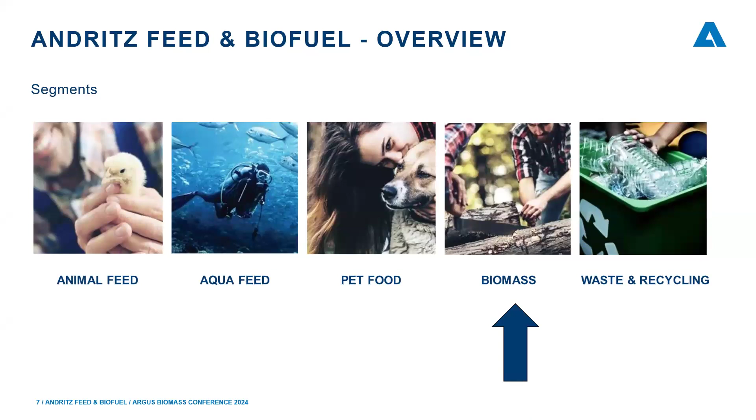Earlier, I was talking about Andritz as a whole. Under Andritz, as I said, we have different verticals. Now I'm talking about Andritz Feed and Biofuel. Under Andritz Feed and Biofuel, we have different segments: animal feed, aqua, pet food, biomass, and waste and recycling. Today, we will be talking about biomass. I will be focusing more on biomass.

Earlier I spoke about Andritz as a whole, then Andritz Feed and Biofuel as an entity, and now Andritz Feed and Biofuel in India. We have a presence in India with a head office in Chennai, located in southeast India. From India, we operate in India, Sri Lanka, and Nepal. We are around 84 employees.

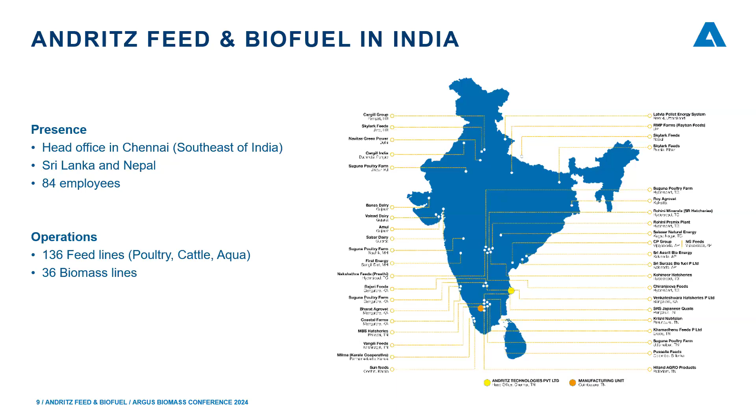On the right-hand side, this is the number of plants we have sold in India, spread all over India, Sri Lanka, and Nepal. At the moment, we have altogether 136 feed lines in poultry, cattle, and aqua, which we are not talking about today. We are talking only about biomass, where we have 36 biomass pelleting lines.

How did biomass start in India? Let me give a small background about stubble burning. What is stubble burning? It is actually a practice of intentional burning of straw post harvesting, widely spread after the harvesting of grain like rice and wheat.

This is a very common practice in India, contributing to greenhouse gases. But what is the reason people choose stubble burning? Because it is very cost effective and cheaper compared to alternative removal methods.

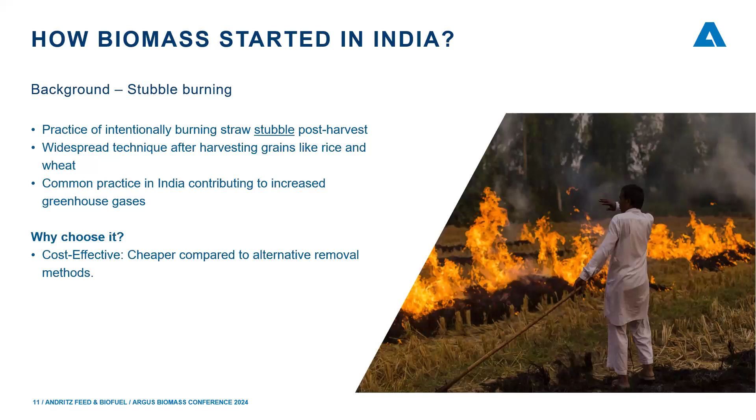If you see the stubble burning effects and solutions - what are the effects? Air pollution leading to poor air quality and health issues, risk of fire which can sometimes go out of control, and emission of greenhouse gases. The pictures on the right-hand side are taken from NASA satellite images, capturing where stubble burning happened in North India and how the smoke spread all over North India.

What is the alternate solution? The alternate solution to reduce pollution from stubble burning involves mitigating crop farming, adhering to diversification of agriculture, adopting paddy straw farming techniques, and making biomass pellets and briquettes.

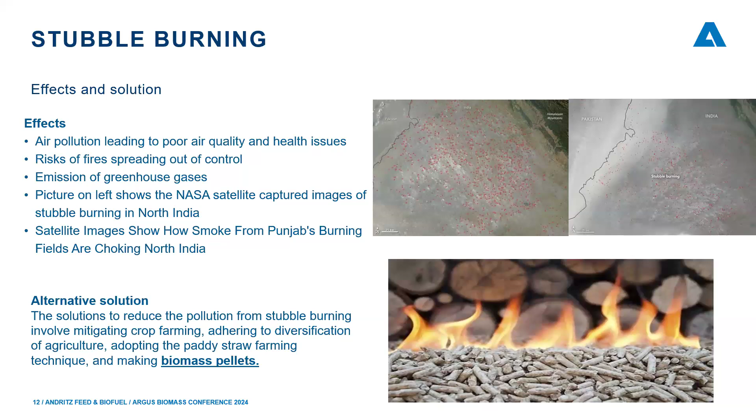This is biomass generation in India - a small insight into key biomass categories. India, being a diverse crop pattern yield, generates 730 million tons of biomass annually, out of which 500 million tons is utilized for mulching, power generation, cattle feed, and steam production. Apart from that, another 230 million tons is surplus biomass, which is just being burnt in fields.

The main biomass categories include bagasse, which is 90 million tons per year, mustard, cotton stalks, and last but not least, paddy, which is ample in India.

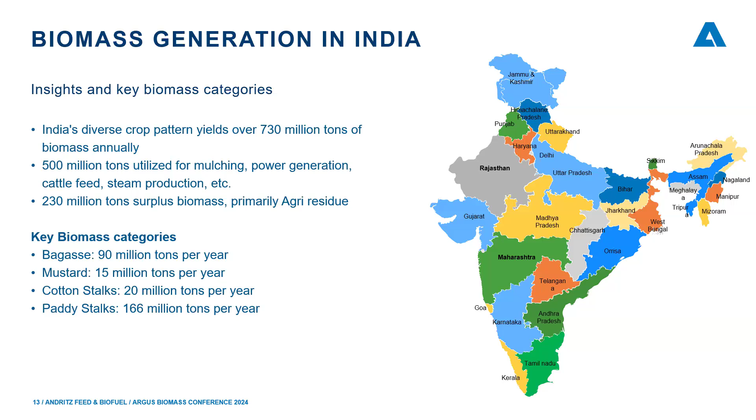Where can this biomass be utilized? This is an integration part in power generation. NTPC, popularly known as National Thermal Power Corporation of India, generates 25% of power in India. They have 27 power stations producing 52 gigawatts, and 9 associate stations contributing 7 gigawatts. If NTPC starts co-firing these biomass pellets, they would need at least 30,000 tons of pellets per day.

Beyond NTPC, India has a lot of thermal power plants, numbering 233 stations with an installed capacity of 330 gigawatts. If these thermal power plants start co-firing 5% agriculture biomass pellets, they would need around 160,000 tons of pellets per day. We also have 280 coal-based power plants producing a capacity of 400 gigawatts. If they go a minimum of 5% biomass pellets, they would need around 192,000 tons per day of pellets, which is quite huge.

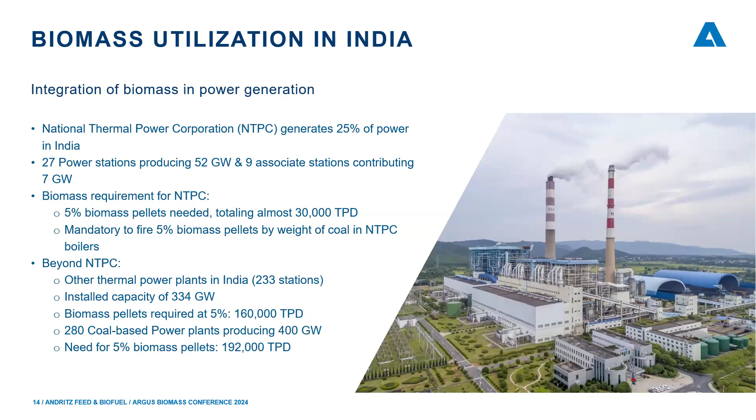Okay, what drives this? If somebody wants to put a plant, what exactly drives them? It is something called a biomass program. The Ministry of India has come up with a lot of schemes to support promotion of manufacturing of briquettes and pellets based on cogeneration in industry in India.

What is the objective of this? The objective of the biomass program is to support setting up of biomass briquettes and pellets manufacturing plants, and to support biomass which are non-bagasse based cogeneration projects in industries in India. This was initially from 2021 to 2026, but in my coming slides I'll be saying these are being revised for the next 25 years.

What are the salient features of this biomass program? The program offers Central Financial Assistance to support project developers and service charges for implementing and inspecting agencies. How is the funding being done?

Financial assistance available under this program is as follows: for briquetting and pelleting, anybody who wants to put up a plant gets a minimum of 10 lakhs per metric ton manufacturing capacity, and can go up to 50 lakhs per plant. Any plant which is non-bagasse based, the funding starts from 40 lakhs per megawatt and can avail up to 5 crores per project.

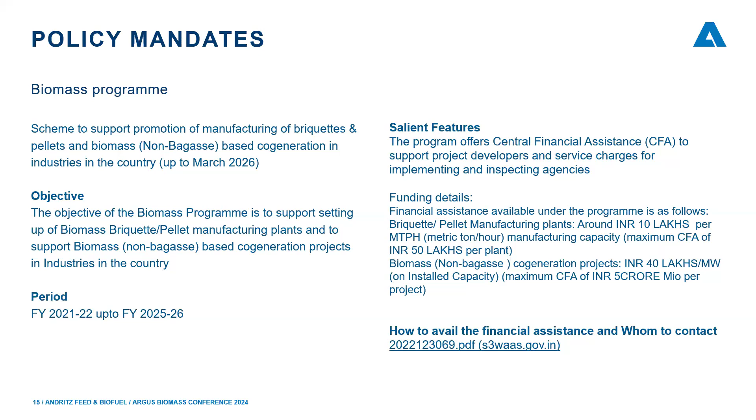The policy which was given earlier is being revised again. Earlier, it was not mandatory that you need to co-fire these biomass pellets with coal. Now the Indian Ministry, the Power Ministry, has come up with mandates that 5% co-firing should be done in thermal power plants from 2024 to 25.

This comes from the Union Ministry of Power and New and Renewable Energy. They revealed that 47 thermal power plants have already engaged in co-firing agro-residue based biomass pellets with coal.

The Ministry of Power made modifications, revising again on this date. As I said, the revised policy now states a minimum of 5% of biomass pellets has to co-fire with all thermal power plants. The obligation is set to increase to 7% from 5% starting financial year 25-26, according to the updated policies.

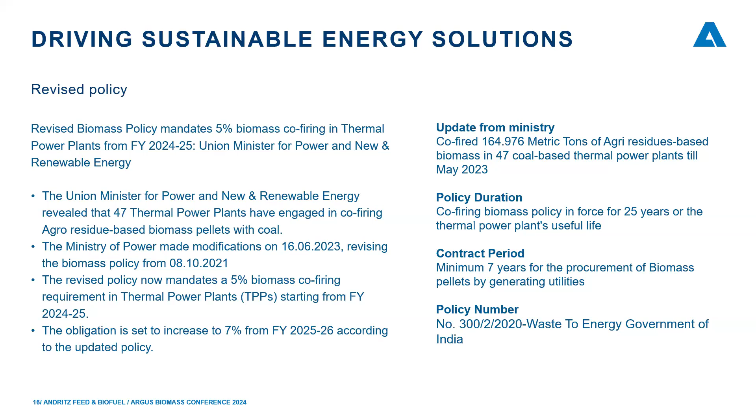The co-firing policy is in force for the next 25 years, or the usage life of the thermal power plant. Contract period: once a company gets into a contract with NTPC, this will go for a minimum of 7 years, during which he can supply the pellets. Again, I have put down the policy numbers.

Now, what is Andritz's contribution? What has Andritz done in biomass in India? Andritz has sold 12 biomass pelleting plants, altogether 36 pelleting lines, producing 550,000 metric tons of pellets per annum, and we have a 40% market share in India.

We have a lot of projects, and at the moment we have ongoing projects. We are building a biomass pelleting plant on bamboo, where the raw material is bamboo, giving a capacity of 325,000 metric tons per annum. This is one plant, and another is on mustard husk, which is 200 tons per day, giving 63,000 metric tons of pellets annually. This plant is coming in Haryana, very close to Delhi NCR.

We are also working with a company called Jindal Power, where we have bagged an order for a biomass pelleting plant on rice straw, with a capacity of 48,000 metric tons per annum. This is part of our global endeavors and collaboration on the world's largest plants. Apart from this, we are also working with a company in India that wants to build the world's largest biomass pelleting plant, of 1.2 million metric tons per annum. The beauty of all this is that we do all turnkey projects.

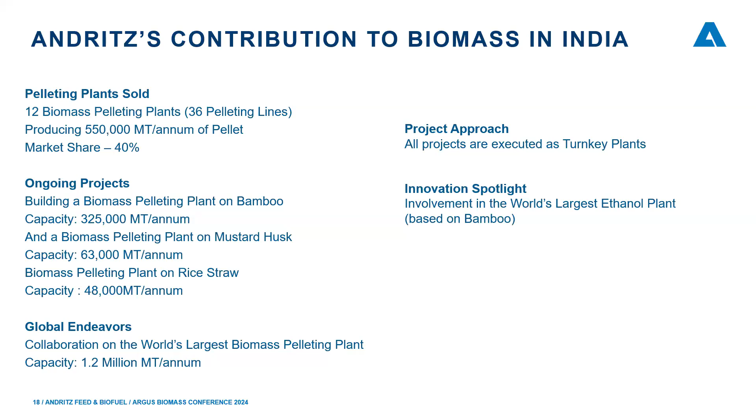The typical flow diagram of a biomass pelleting plant: we start from dumping of raw material, then grinding, drying, pelleting, cooling, sieving, and packing. The complete process is shown in one picture with all the machines shown on the bottom.

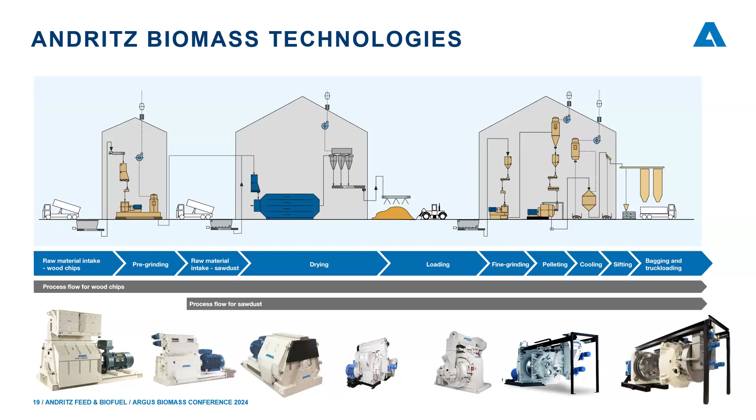The references - as you know, Reliance Industries is one of the largest companies in the world. They have two of the world's largest refineries, located in Jamnagar.

India will fully move from fossil fuel to renewable energy in the next few decades - these are the words from the chairman of Reliance, Mr. Mukesh Ambani. Reliance operates two giant refineries with a combined capacity of 1.4 million barrels per day in Western India, in Jamnagar, and aims to become net zero carbon by 2035.

To start with, they gave an order to Andritz, and this plant was installed in 2023 and has been running successfully for the past two years.

They have gone with a lot of raw materials. Reliance is the only company that gets ample raw material and different kinds of raw materials. Our plants are running on these various raw materials - we have Juliflora, cotton stalks, rice straw, wheat straw, rice husk, sugarcane trash, bagasse, and a little bit of sawdust. These pellets are being co-fired with their refineries.

As I said, they have got two of the world's largest refineries, and they co-fire with coal.

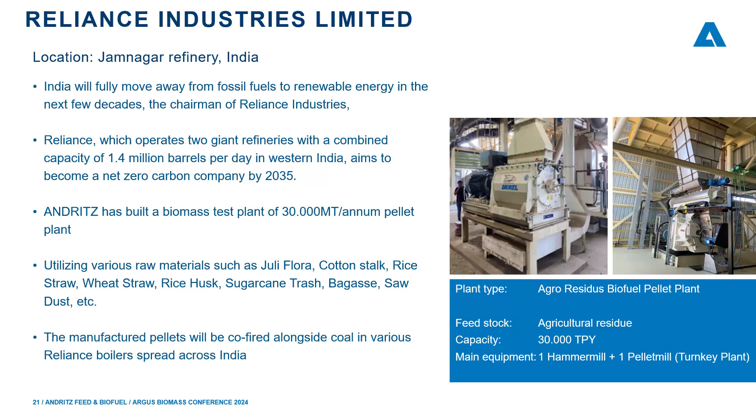Apart from Reliance, Andritz has got the largest plant in India. This plant is of 1,000 tons per day, and the raw material would be bamboo. The company name is Rashmi Metaliks, which is in West Bengal.

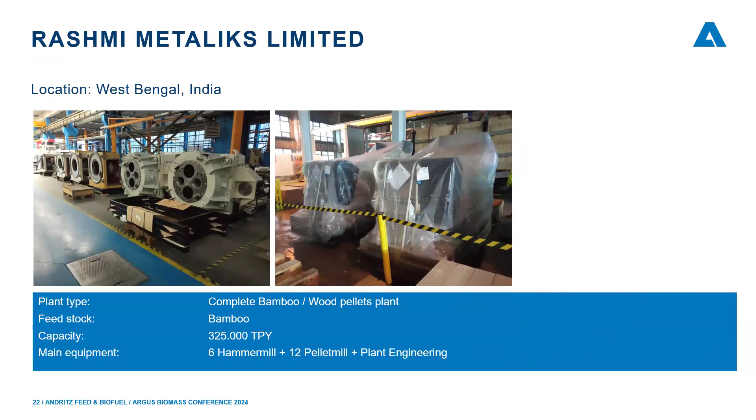We have recently commissioned this plant of 200 tons per day. This is a biomass pelleting plant where the raw material is cotton stalks and rice straw, running successfully. This is the only plant in India, I would proudly say, that is running properly on rice straw, supplied by Andritz. It's a complete turnkey project.

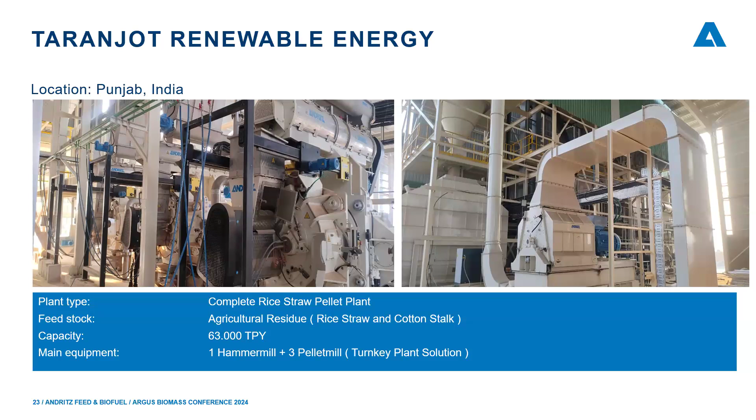This project, as I was talking about the ethanol plant - this is the world's largest ethanol plant where the raw material is bamboo, and a part of the complete plant is given by Andritz. We have given the intake section where the bamboo comes to the plant. We clean the bamboo, we chip it, we store it, we sieve it again, and then send it to the next process. So this complete plant is given by Andritz.

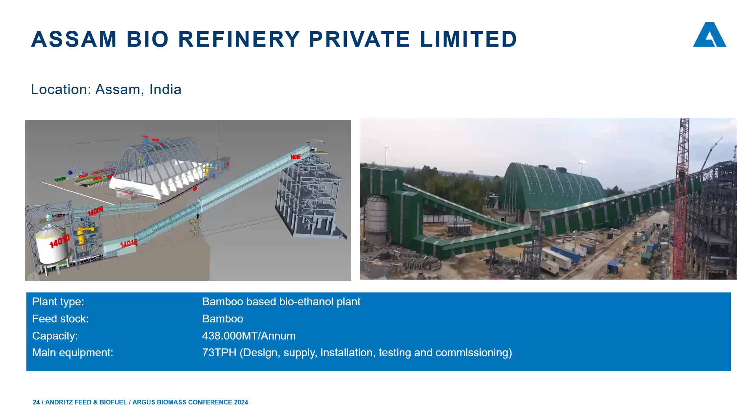What are the key takeaways of my presentation? Andritz has been playing a pivotal role in driving biomass development in India, contributing significantly to a sustainable future through 12 biomass pelleting plants, producing 550,000 metric tons per annum.

Currently, as I've mentioned, we are working with 200 and 160 ton biomass pelleting lines, which are under commissioning. At Andritz, we prioritize a comprehensive approach, executing all projects as turnkey projects.

As I said, I can vouch for it - Andritz is the only company in India that gives turnkey projects. Our success lies in combining Andritz technologies with a global team of experts and excellent post-service support.

As I said, we have a team of 84 people - engineering team, procurement team, commissioning team, after sales. We do have spare parts. Andritz is the only company that keeps spare parts worth 1 million euros in India, where our contract states we can give a service within 24 hours.

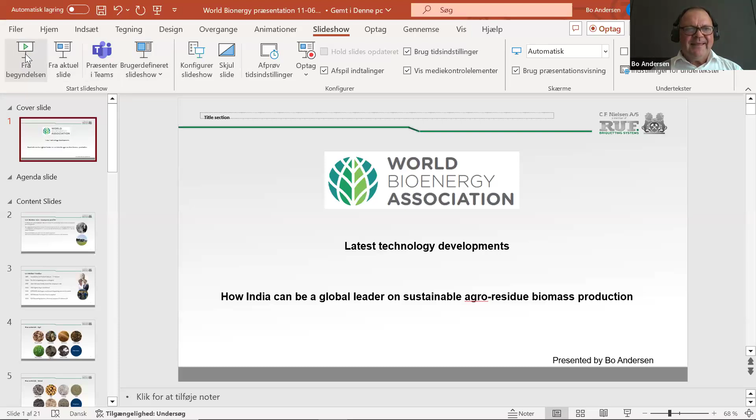Anyway, I will do my presentation here and explain a little bit about how CF Nielsen is and how we have developed over time and the things that we can provide within the briquetting field. I think we'll leave the questions until later because we for sure have some answers about the differences between pelleting and briquetting as well.

CF Nielsen is a very old company which was founded in 1889, so more than 130 years ago. It was founded by Carl Frederik Nielsen, whereof the name comes. He did shorten it up a little bit to make it easier for everyone to say, I guess. But it was not until the 40s, during lack of fuel in the world, that the first briquetting press was designed in the company. This has, of course, then developed over time to be what it is today, which we will get more into later on.

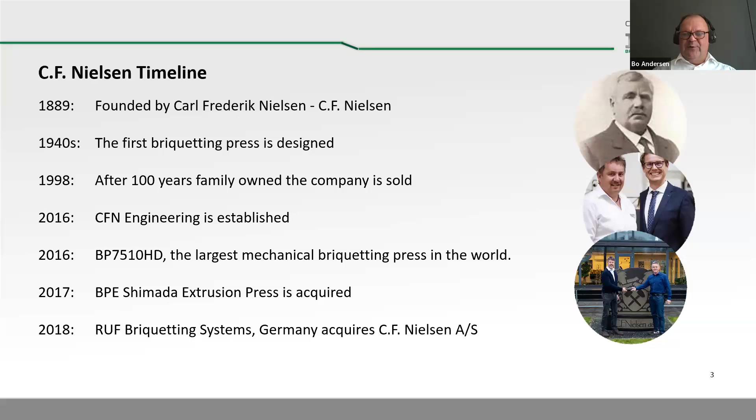As Pavan also mentioned before, it is possible to briquette basically any agricultural raw material. The issue is that we require a dry, or relatively dry, raw material. We need the particle sizes to be relatively small. To compare a little bit with pelleting plants, normally you see that a briquetting plant is a little bit more simple, meaning that it is also able to handle bigger particles and is able to run smoothly with a bigger variety of moisture content. So that's one of the main differences between the two.

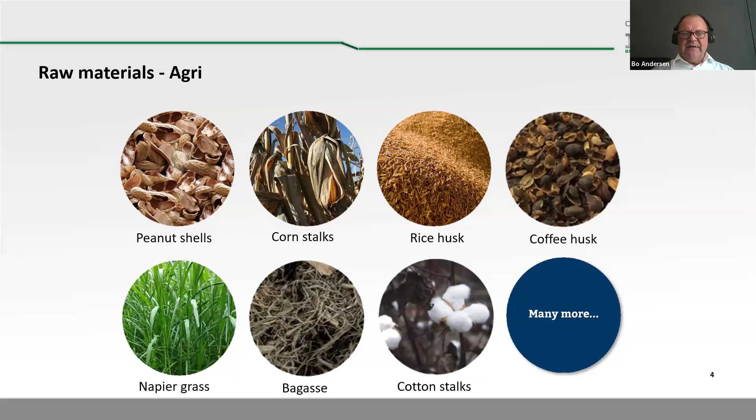Then we, of course, are able to produce briquettes from wood of basically any kind, which was where it all started. It has, of course, developed over the last maybe 10, 15 years, with things like torrefied wood and other kinds of torrefaction technologies that need densification as well.

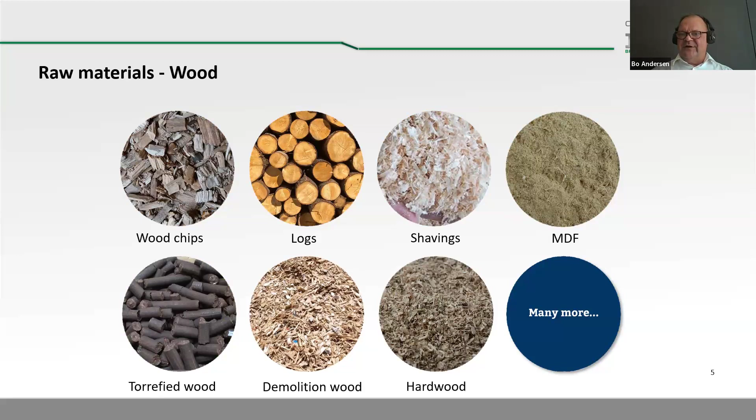Here we have it again, you can say our requirements. We need a homogeneous raw material. In case companies have a lot of different raw materials, they basically have two options. Either they set up the machine for one raw material and run it for a period of time, whereafter they change over with new die sets and parameters in the machines and run the other one. Otherwise, it's also possible to mix the raw materials, but it's important that the mix is well done and preferably controlled in our system, so that we're able to run, say, 50 or 30% of one and 70% of another. It goes through a mixer before it goes into the machine. In that way, we will basically create a new homogeneous raw material.

Moisture content between 6 and 16% is what would normally work, and that means I would say 95% of the raw materials will work within this range. Some will even work a little bit higher, but it's again an individual examination whether it will work or not, and tests would definitely have to be done when we get outside of these ranges.

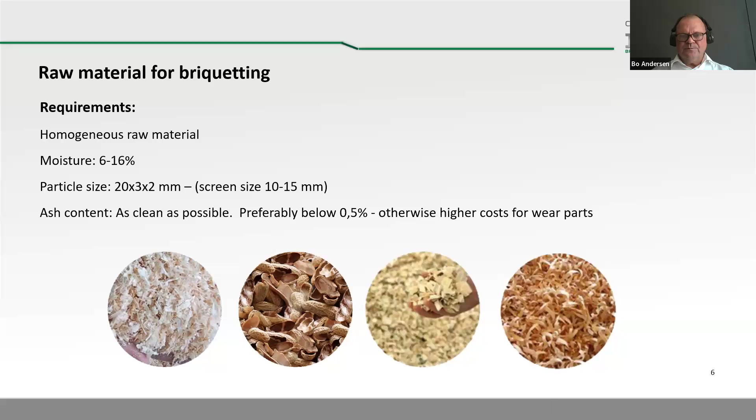Here's a sample picture of a lot of different raw materials that can be briquetted, different forms as well. You see most of these are made on what we call mechanical briquetting machines coming from CF Nielsen, where you have...

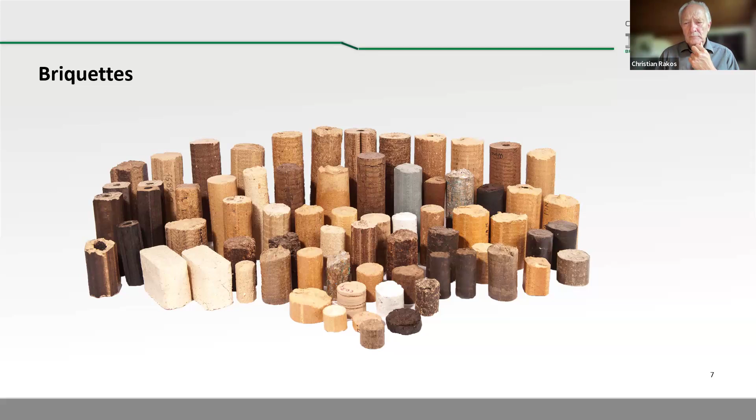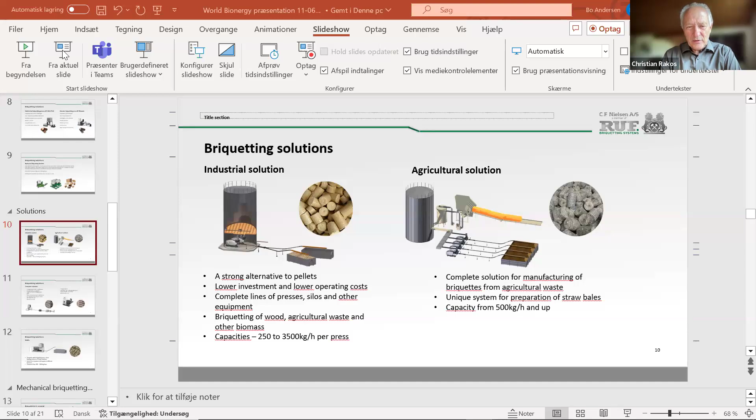Oh, we cannot hear you right now. Something is wrong. He left the session. Okay, Bo fell out of the session. That's too bad. Okie doke, so what are we going to do now? Let's wait to see for a moment if Bo can reconnect. Does not seem to reconnect at the moment. Sorry about this technical glitch, ladies and gentlemen, our speaker has fallen off the cliff of connection. I think he's back. He's back, okay Bo, you're back. You fell out of connection, you still need to connect to the audio signal, we cannot hear you yet. Unmute your microphone, can you hear me now? Yes, now you're back, sorry about this. Okay, there's always a risk with the webinar. Bo, you're now fine, just okay, return to full screen mode please. Yes, and you can take it from there.

Okay great, I hope this was where we were. All right.

The capacities from 250 to 3.5 ton are also related to the size of the briquette, which was one of the points from before. You can say a smaller capacity machine will also make a smaller diameter, so going upwards from 50, 60, 75, 100, 90, up to 120 millimeter. With a 120 millimeter machine, you will be able to produce 3 to 3.5 ton per hour. So this relation you would always have.

A thing which was talked about before regarding the size is that the diameter is given and related to the capacity requirement, but the length of the briquette is something we can control. We have different devices so that we are able to cut or break off the briquettes in a given length, down to about 10, 15 millimeter as the smallest one. We would call that pucks, which could be very suitable for automatic infeed systems in industrial boilers or similar.

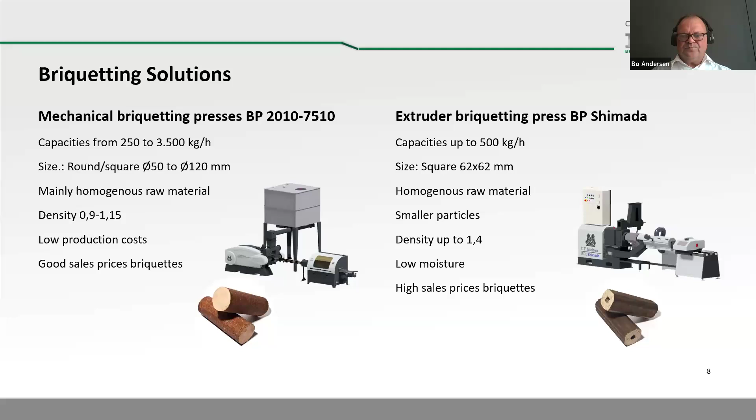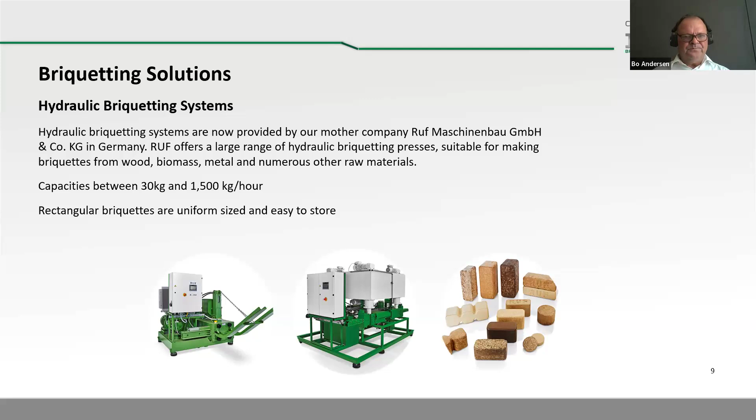Here you can say that briquettes are a strong alternative to pellets, but in any case, this depends on what market, what is the purpose of the fuel, how are the in-feed systems. All these things need to be taken into consideration. Our strong points are that it is generally a lower investment, especially for lower capacities. We have significantly lower operational costs. It is typically easier for customers, especially if they have variations in their raw material, to get a briquetting line to work.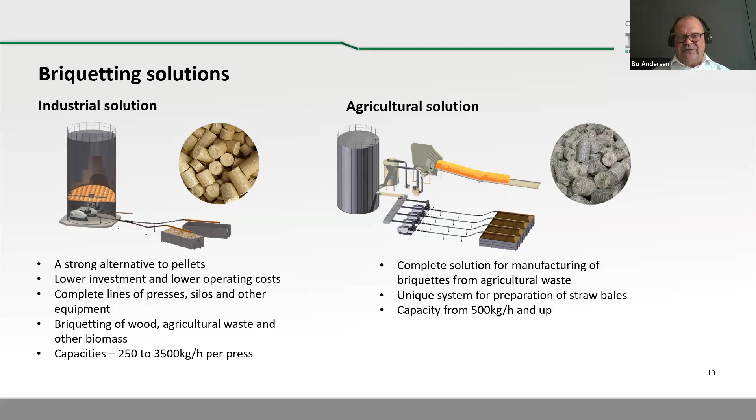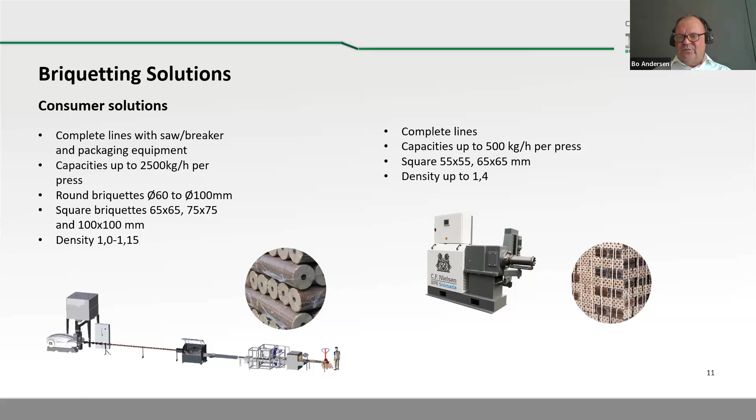Anyway, here we are showing industrial solutions, agricultural solutions. It's based on the same briquetting presses, the same briquetting press lines. So it is more about how the preparation line works, what is the preparation requirement before the briquetting, and how are the accessories supplied with the machines. This as well shown is just the consumer solution, which is when you have briquettes sold for the private consumer, probably not very relevant in the Indian market, unless there could be an export opportunity. But in this case, we are still based on the same machine, but there will be a cutting saw as well as automatic packaging at the end.

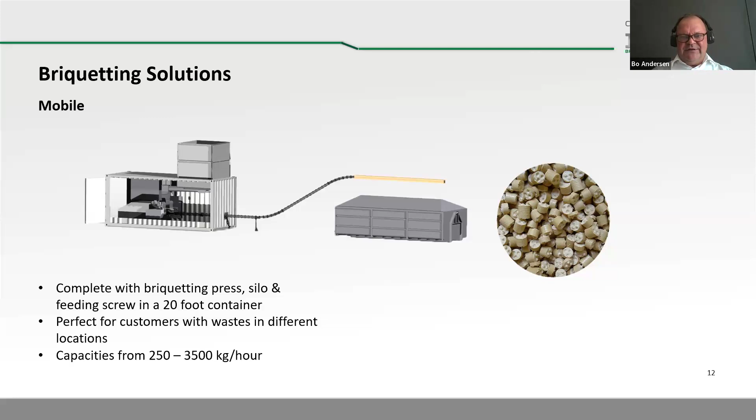One solution that could be interesting, which we have talked with several Indian customers about, is the mobile solution, where the briquetting press is integrated into a 20-foot container. This you can set up, or move to another place, within one day. This is an advantage in case you have different kinds of crops where you need to move the briquetting press, or different areas where you harvest from, where it would make sense to get it closer to the raw material. It is, though, something to take into consideration, because in case drying, downsizing, etc. is required before the briquetting, it might not make sense to make a mobile briquetting solution if you still have a stationary dryer. So again, something that needs to be looked into for any individual project.

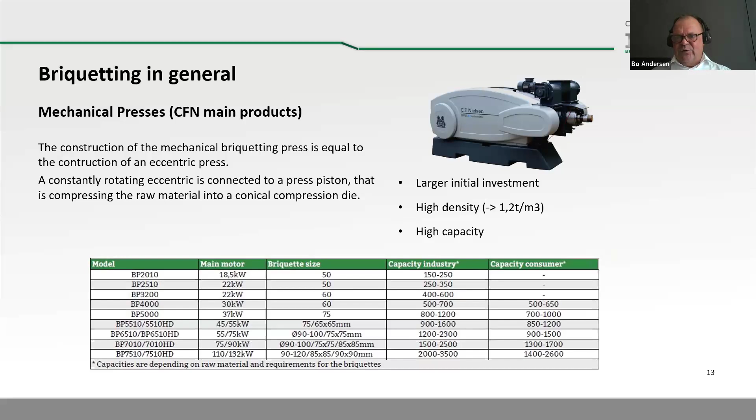Here you have the range again for the machines, as well as the briquette sizes that come out of it. As the presentations here are going to be shared afterwards, I'll not go into the individual machines here.

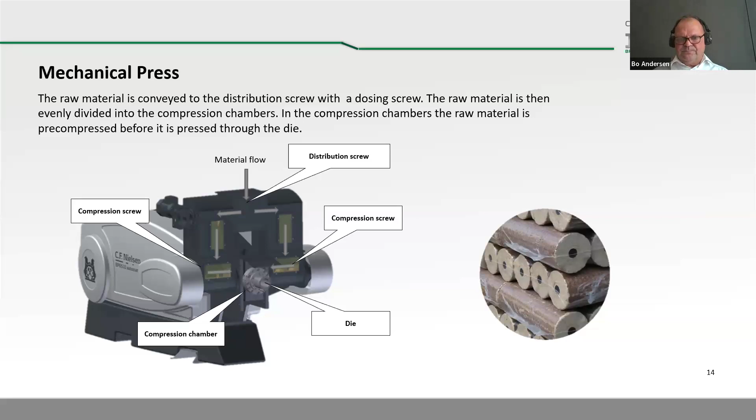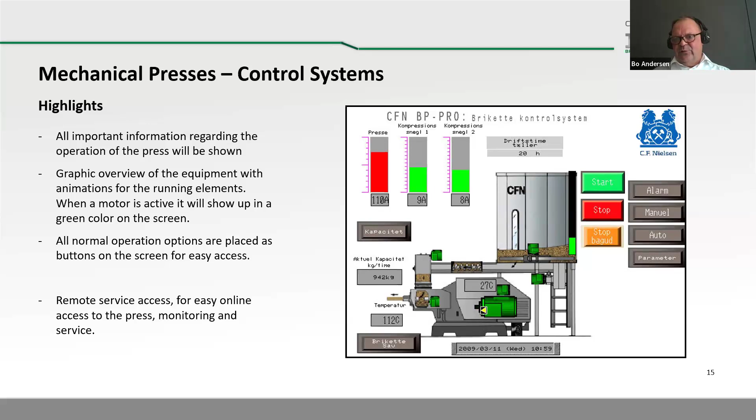Control systems, we will pass that fast as well, but everything is controlled via our touch panel and PLC control, and you are able to monitor and even control from remote. This is also a great advantage, that we will be able to access our PLC from anywhere around the world, basically, and from the factory in case of servicing.

Engineering that we mentioned before is that we, if the customer requires it, can go into the discussion and help with regards to, often, drying systems, downsizing equipment, to be able to provide a raw material that would work in our machines. We do not manufacture these things, but we have found that it is often necessary and a good idea if we get involved in this and discuss it, and then we can help our customer choose right, whatever they want to do.

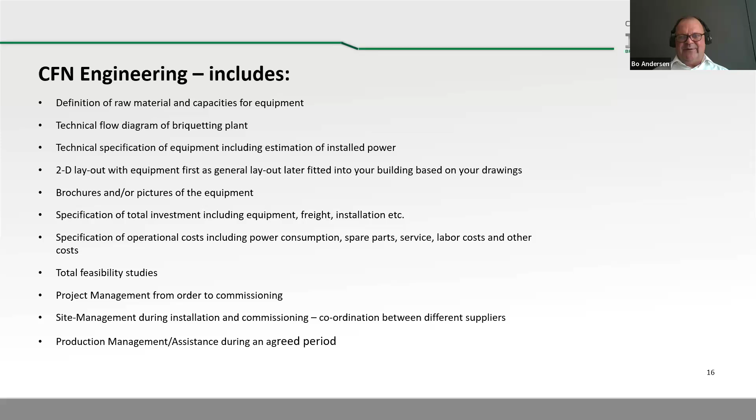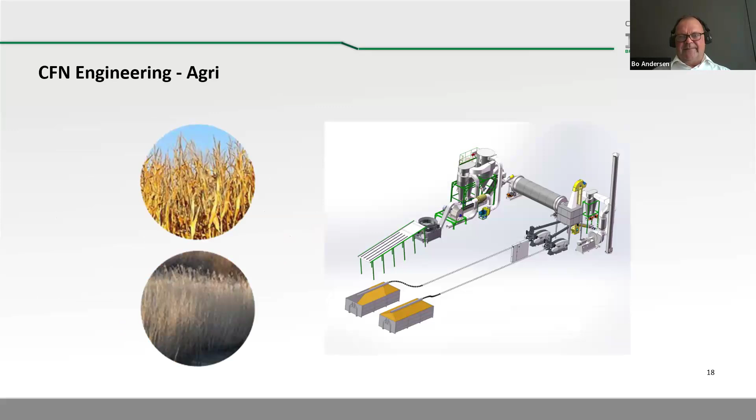Then I will just mention some of these features that are included in our machines, which is, I think, relevant in relation to India, where there are quite a few companies supplying briquetting equipment as well. The dosing screws making the feed in, the infeed of the material, is controlled by our control panel, and for example, when you want to mix raw materials, you'll be able to control it very precisely. We have a possibility of adding different kinds of binders or additives into the briquette in case that would be necessary. I would say 85%, 90% of the time it's not necessary, but it could be for some very difficult raw materials where it's possible.

We have automatic preheating of main and extension die, meaning that when the machine needs to start up, it will heat up the dies, which makes it much easier to push out the briquette, which has been very hard inside the die from the day before. I'm sure that is something which has been seen as a problem in India before. So by doing this, the problem is eliminated, and you can have an easy start.

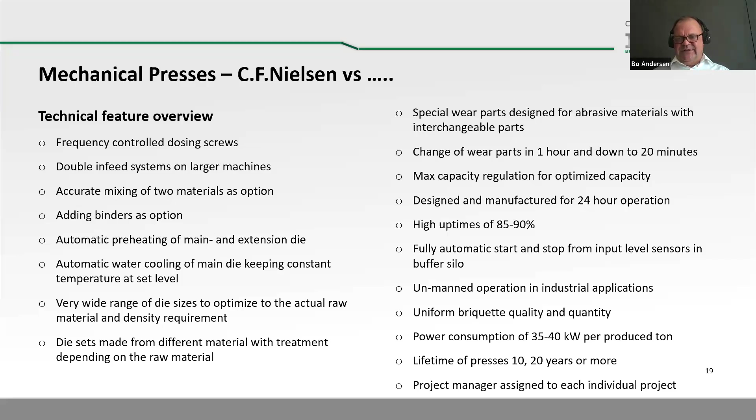Last thing here, we normally assign a project manager to every individual project, big or small, to ensure that the customer gets what they want and what they require.

Finally, you can say there are three overall requirements to reach the goal that we would like to have. That is the raw material as one - it needs to be available in a reasonable way, and it needs to be uniform. And of course, it's adapted to the individual project - the people involved, management, as well as the operator, must have, you can say, a mindset for this.

There would definitely be education in operating the machines, but it is surely important that the mindsets are right to get a positive outcome of a line, and that is independent on whether it's a pelleting or briquetting line.

Equipment, yes, that's the last of the three. Where I say you need to have, of course, quality equipment, which is specified and set up for the specific project, to get optimized feasibility over the long run. High investment, but it will come back, I'm sure.

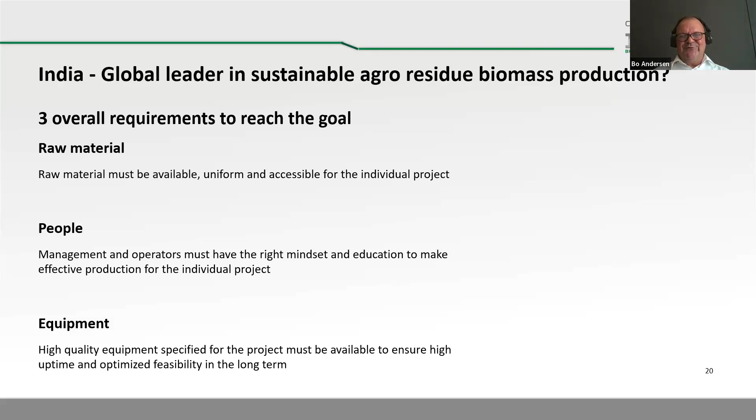There was one short question for you that I will ask, and that is, do you have a presence in India? Do you have an office in India? We don't have an office in India.

I handle the Indian market from Vietnam, where I'm based. This would be on an individual basis, and we of course come there, but we don't have a setup in India.

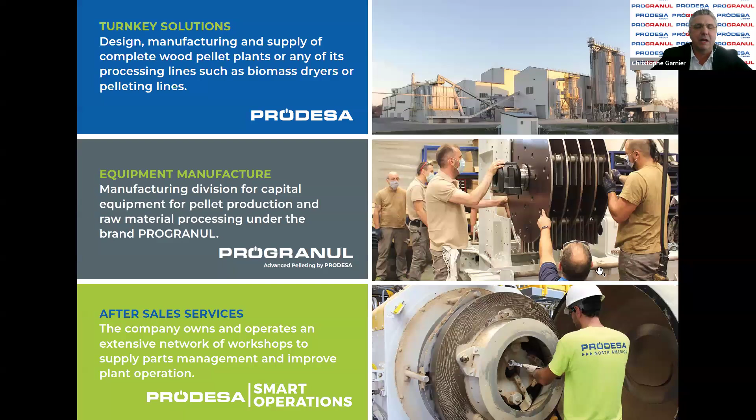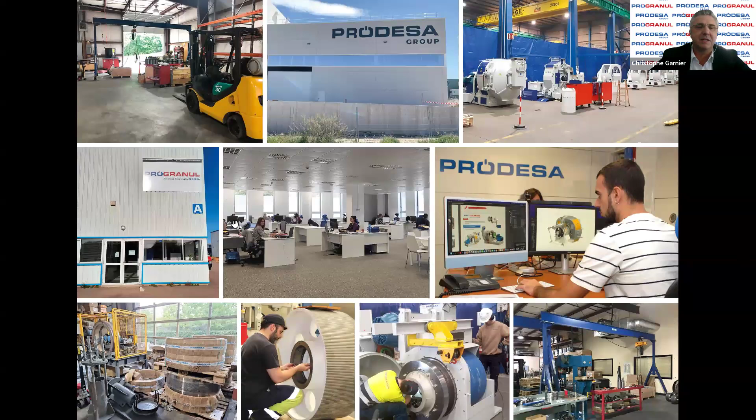As I mentioned, our headquarters is in Spain, with branches worldwide. Here are some pictures of our different facilities. We have been a major player in the biomass sector for almost 20 to 25 years, active in Europe, Russia, America, and Asia. In these pictures you can see different units we have built, some quite large in size and others smaller.

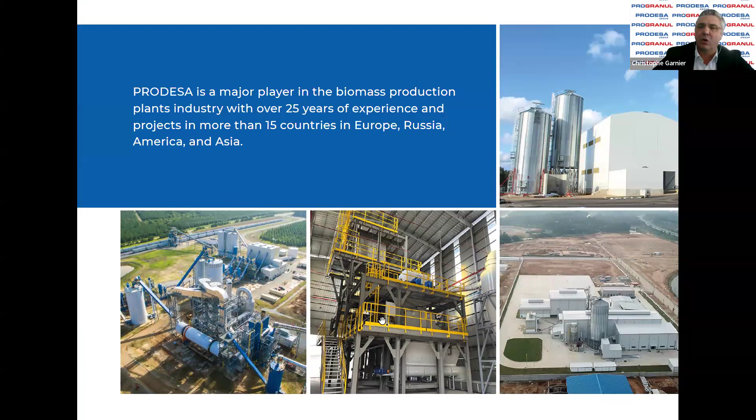Going into details regarding agro pellets, one important thing about agro material compared to wood is that usually they are not stable in moisture, so they can have a high variation of moisture content. Also, the quantity of sodium, potassium, and chlorine is higher than in wood. For the majority of agro materials, there is a high quantity of ash, and these minerals create a low ash fusion temperature. That's a major difference with wood.

Producing pellets or briquettes makes the transport and handling of agro materials more efficient and less expensive. It also allows adding some additives to neutralize the effect of chlorine and alkalines. The pellet itself doesn't help with combustion, but the addition of additives can help for the final combustion.

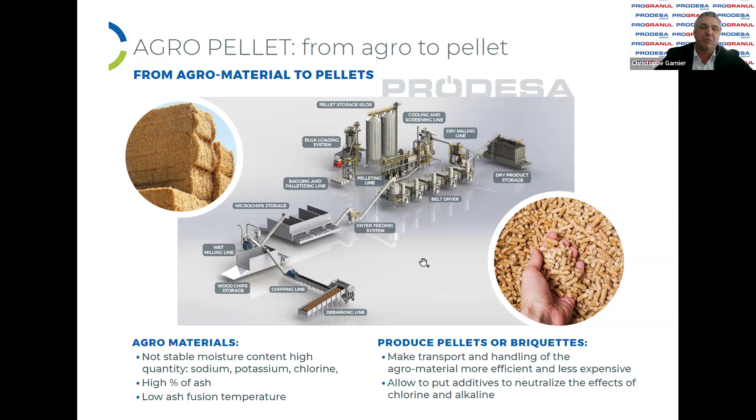In this picture you can see different packages and lines to get the pellets. Regarding the first step, when using bales in a process, there's the bale feeding system, and you have to consider which size of bales you'll use—round or square—and what density the bale will be. The strapping material is also important, and whether you have different raw materials. You also have to consider the seasonality of supply for each raw material. At Prodesa, we strongly suggest having a buffer storage of bales under roof, in a hangar or building, and putting the whole preparation line under roof, controlling the raw material moisture content of the bale.

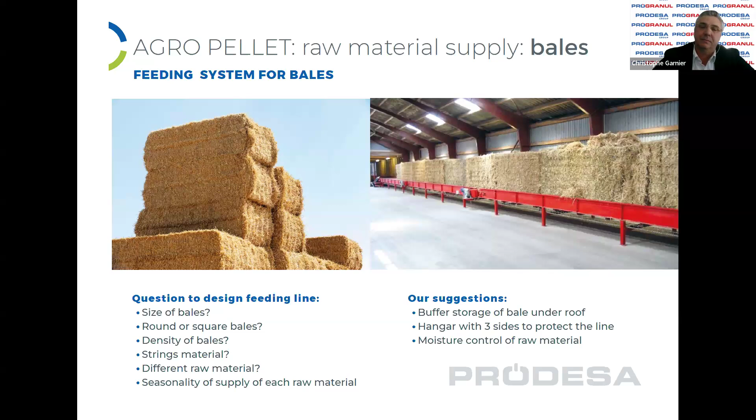If you have bulk material, like husk from different seeds such as rice or wheat, you use a feeding system for bulk material, and you need to understand how many raw materials you want to combine, whether you want to mix products, and whether each material has seasonality. You also have to be careful with self-combustion or explosiveness of the bulk material—some materials are quite stable in terms of explosiveness risk when dry, but can still be subject to self-combustion.

So you have to be careful about that. The size of the particles, the density, the moisture of each bulk material are very important for us for the design of the line. As mentioned by Christian a bit before, the density of dry material is very light, so we have to design the conveyors and all the equipment taking that into consideration.

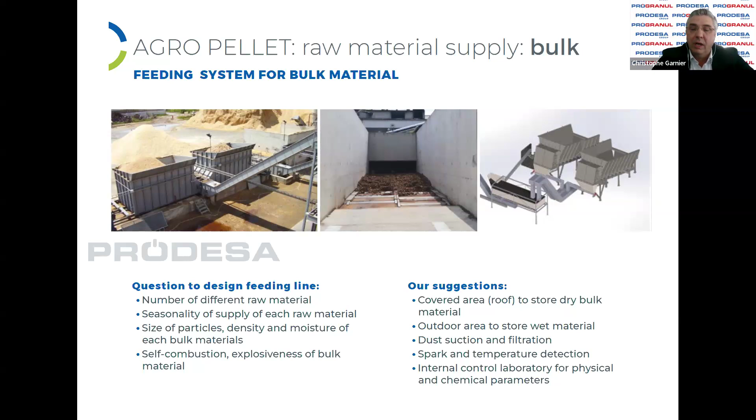Our suggestion is also to have a roof to protect dry material, and for wet material you can put that outdoor. For these materials, dust extraction and filtration are mandatory. Spark and temperature detection are also very important because you are going to produce a fuel, so it's logical that you take care about spark and fire detection inside the process. We also strongly recommend internal control for physical and chemical parameters.

When you are going to use bales, one of the first steps will be to have a bale breaker to destroy the bale, to mill, in fact, the bale. Again, the question of the size, whether it is round or square, and the different material you get is very important. We also suggest having this line indoor with dust aspiration and spark detection on this bale breaking system.

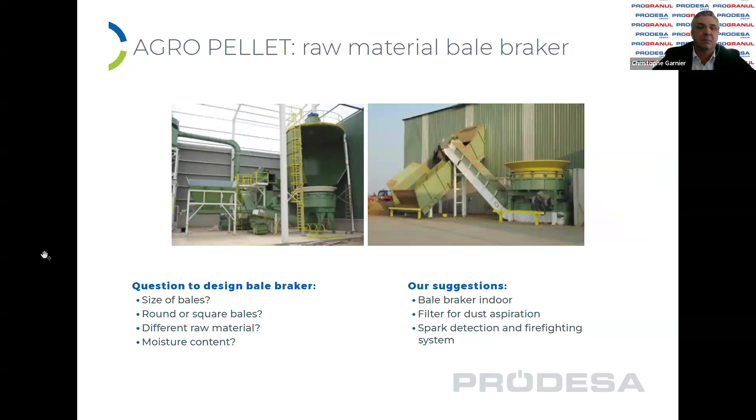If you have raw material that is wet—higher than 15% moisture content—and with big particles, we recommend going to a pre-milling machine, a pre-hammer mill, to pre-mill the material to get it small enough for the downstream process, which would be the dryer. You can dry some big particles in size, but what is very important is to have thin particles, small in thickness, to get an efficient drying. You can see in the picture the kind of material we need to get to go to the dryer.

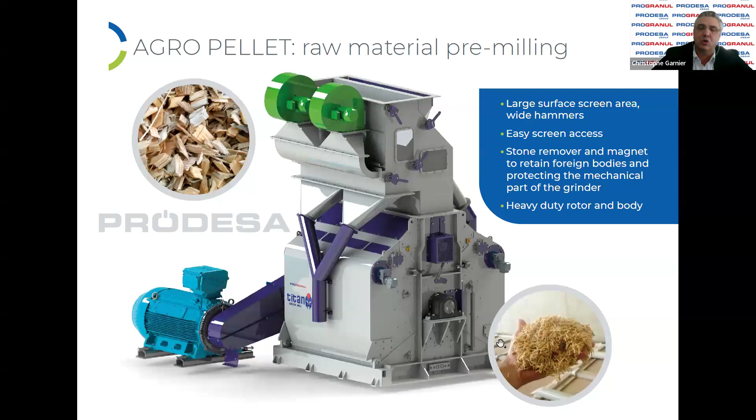Here you have some pictures of the milling line, the pre-milling line before drying. Again, always the same questions regarding the material: what is the size of the material, the different material you want to mill, and the moisture content. This line has to be inside the building, and because you will get most probably quite dry material—even if it's not dry enough for the pelleting process—you have to take care about dust aspiration, filtration, and also spark detection and a firefighting system in this line.

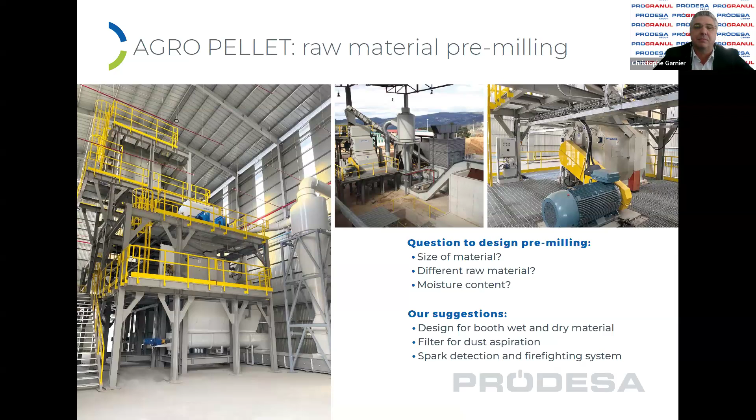Regarding the dryer, we were talking about this a bit previously as well, that you have to dry the material if it's higher than 10–15% moisture. It depends, of course, on the kind of material you can get—there is not the same moisture tolerance depending on the material you want to pelletize. Regarding dryers, we can supply you two technologies: drum dryers with high temperature and belt dryers with low temperature.

There is a mistake in the presentation, sorry for that. The low temperature belt dryer usually works with waste energy or with energy coming from cogeneration or biomass boilers, and it provides very high pellet quality with minimal fire risk because we are working with low temperature. Also, you can extend your dryer because they are modular in design. The drum dryer works with high temperature, so it's a high-efficiency technology, with low power consumption, and it's automatically operated and controlled.

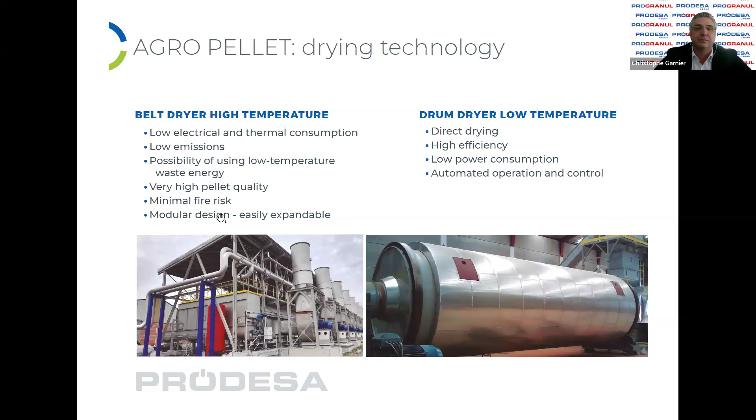Here you have a presentation of our low temperature belt dryer. This is an example for sugarcane bagasse. You have a feeding system with twin screws to make the layer of the product inside the belt, and you have the exchangers on top of the dryer. We supply hot water into those exchangers, and then the air crosses the exchanger, then crosses the product and the belt, and there are fans sucking the air with the steam, with the water extracted from the material. At the end of the belt, you have a dry product that can go to the next steps, which would be milling and pelletizing.

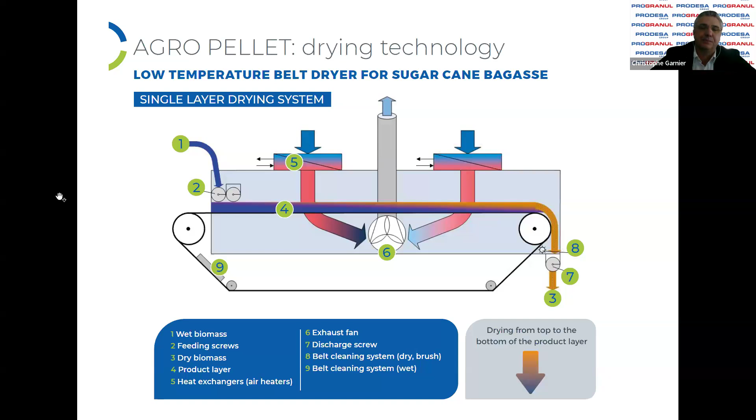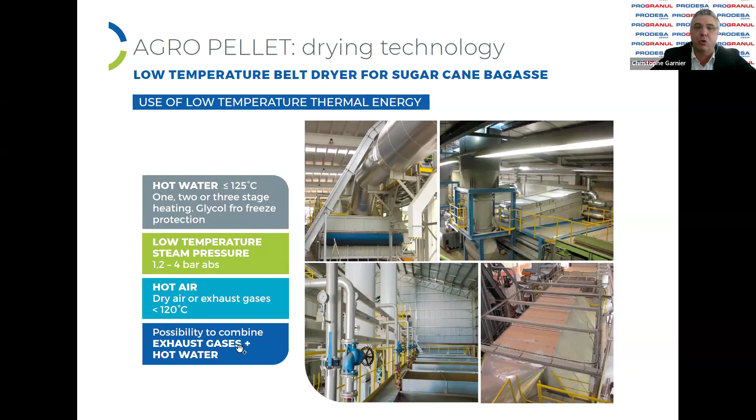In our belt dryer, we can work with hot water. We can also work with low temperature steam, with hot air, and with a combination of different sources like exhaust gas and hot water, for example. So we can.

The next step after the dryer will be to mill the material. So we need another step of milling to create a powder after the drying line. We are feeding this dry material inside a dry hammer mill, which is equipment working with high-speed hammers and a screen. We can produce a very small product, around 3 to 4 millimeters in size.

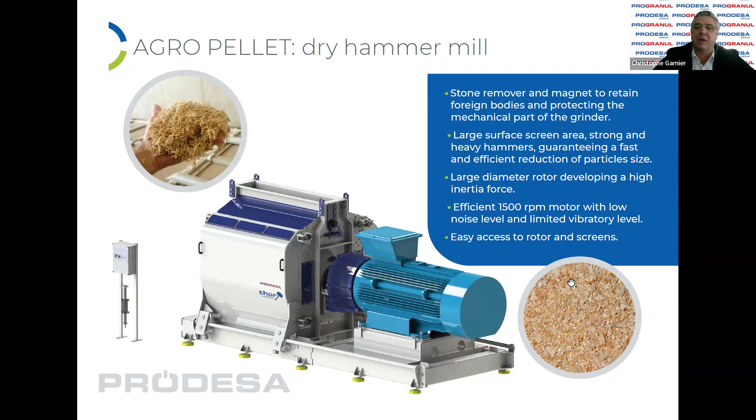And then this material we can use inside the pellet mill. Here you have some photos of the dry hammer mill. Same question to ask when we are designing a hammer mill: what will be the size of the material depending on the raw material and the moisture content we will get. We can avoid having the wet milling line and the dryer if the product is thin enough and dry enough.

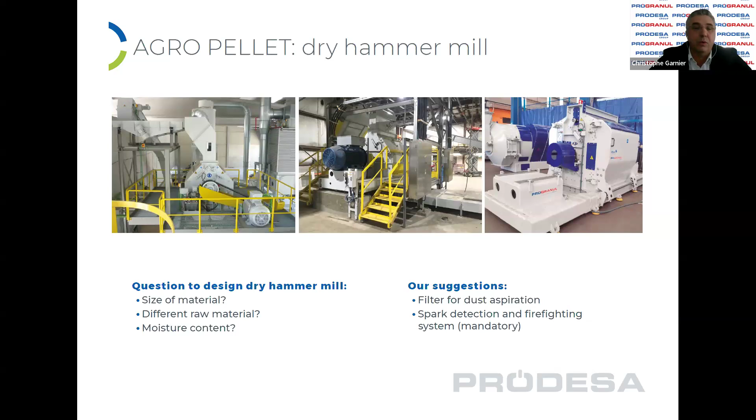Before going to the pelleting line, we are going to mix the different materials, and that's an important operation, especially when we have different raw materials. If you want to make a pellet compound with different raw materials, you have to mix them previously to the pelleting line. That can be a batch operation or a continuous operation.

Also in this mixing step, it's the place where we will be capable of dosing and adding additives to neutralize the effect of the chlorine and the alkaline. Those additives will depend, in quantity and kind, on the material you will pelletize.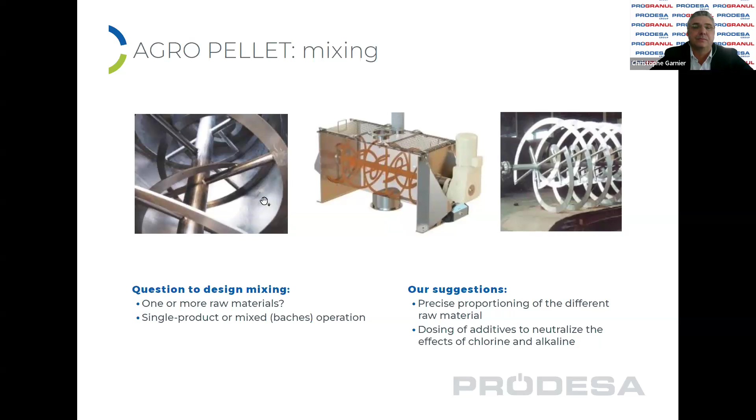The last step in the process will be the pelletizing. So we are supplying pellet mills with ring dies, with a very low wear cost of spare parts, very simple equipment to maintain, and we can work with a very wide range of applications. We are capable of working with many kinds of agro products or wood.

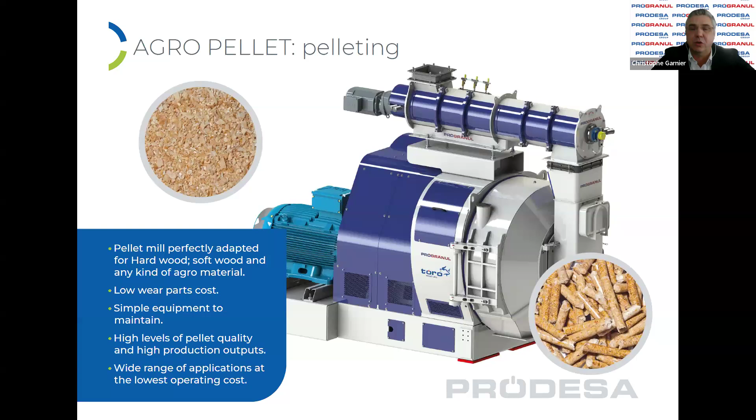You can see here some pictures of different factories working in wood and agro. Here is a line of 15 pellet mills of 5 tons per hour. That's one single machine of 5 to 7 tons per hour, depending on the raw material you will pelletize, and some other lines.

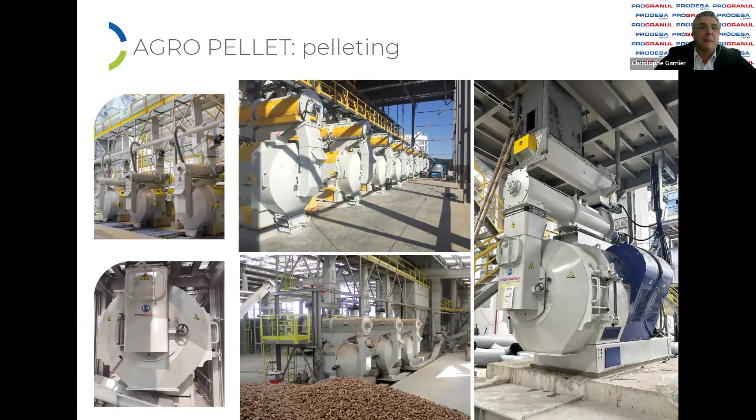After the pelleting line, you have the cooler. The cooler is a counterflow system. The pellets coming out from the pellet mills are around 100 degrees, a bit less, 90 to 100 degrees. We are cooling with the ambient air to a temperature close to the ambient air plus 7 to 10 degrees. After the cooling operation, we are screening the pellets to take out the fines and broken pellets generated during handling between the pelletizing and the cooling.

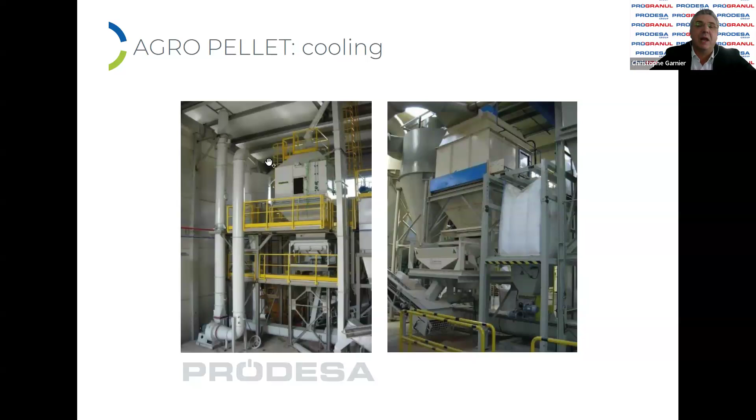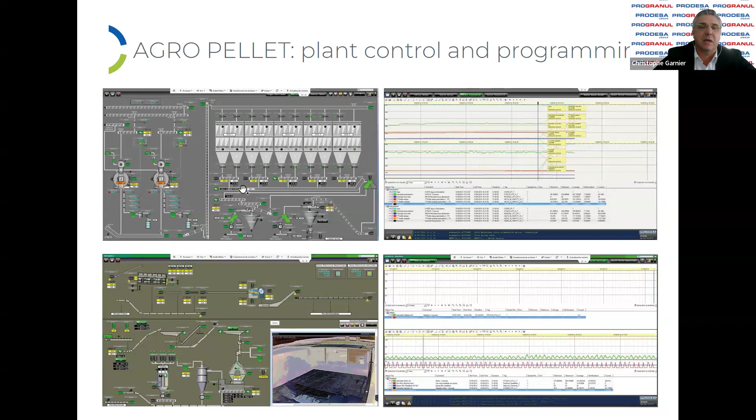A very important thing in the pelleting plant is the control and programming of the equipment. We have many machines working all together, and the SCADA is very important to control the complete operation of the plant automatically, without many people involved. So Prodesa is developing the SCADA for the full line of the pelleting process, integrating the dryer, the preparation, the dry milling, wet milling, pelletizing, etc.

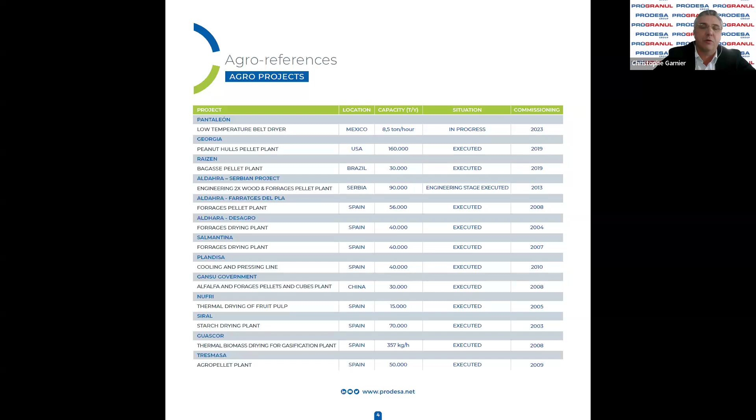I'm going to show you also some examples of plants we have done recently working in agro. That's our last reference for agro projects. We have done pelleting and drying plants in different countries for bagasse, peanut hulls, straw, and fruit pulp, etc. That's one big line we have done in Mexico, where we are doing right now 8.5 tons per hour of sugarcane.

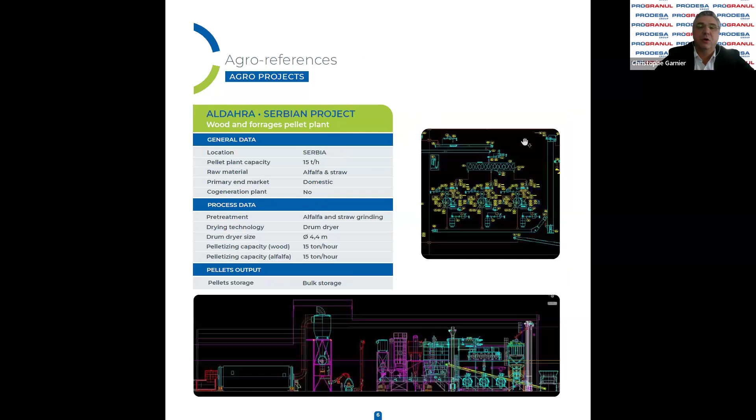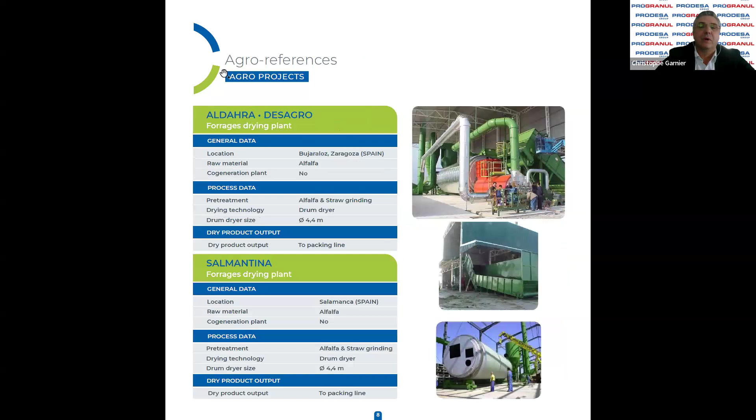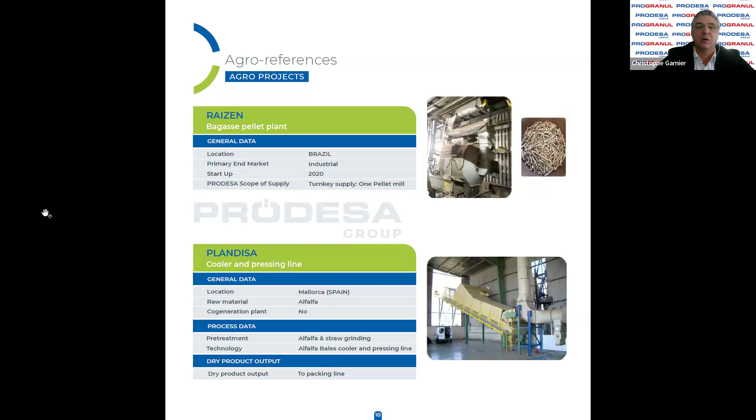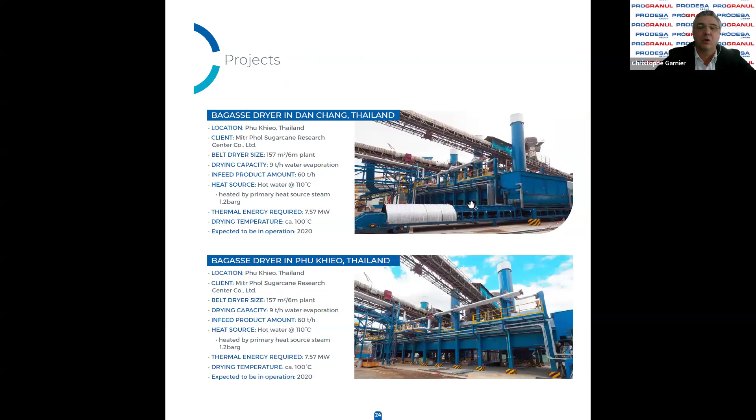So I'm going to show you also some drying lines we have recently developed, together with our partner Swiss Combi, for bagasse in Thailand. So different plants we have developed in Thailand to dry bagasse, and also one unit in China.

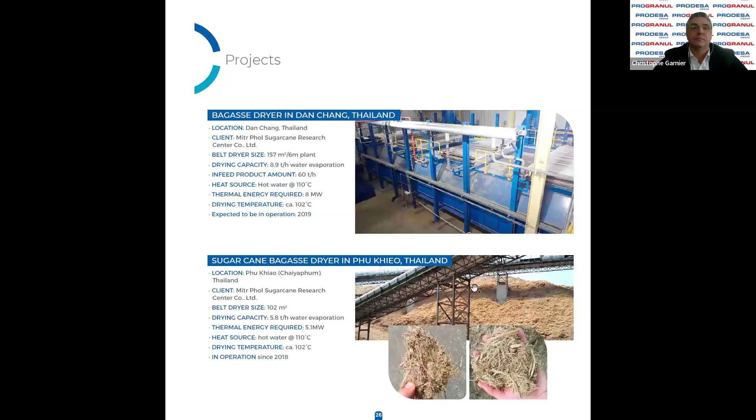Okay, I'm done. Thank you. Many thanks, that was very comprehensive and interesting.

Thank you, Christophe. I'd like to thank you particularly for mentioning the safety aspects, because safety is very often underestimated or not taken into account. Obviously, all project developers want to save money, so very often spark detection gets skipped - 'we don't have sparks.'

Safety is really an absolutely critical element of a pellet plant. That also applies to the topic of dust suction. Otherwise, you have a very heavy load of dust in the factory and health issues for your employees.

You mentioned self-combustion - it also depends on the raw material, but we have had lots of fires. I should let you know that in Canada, at one point it was not possible to insure a pellet plant because so many pellet plants were affected by fires or dust explosions. The insurance company said no insurance for that type of company. Now they have implemented very stringent health and safety procedures, and it's possible again to get insurance.